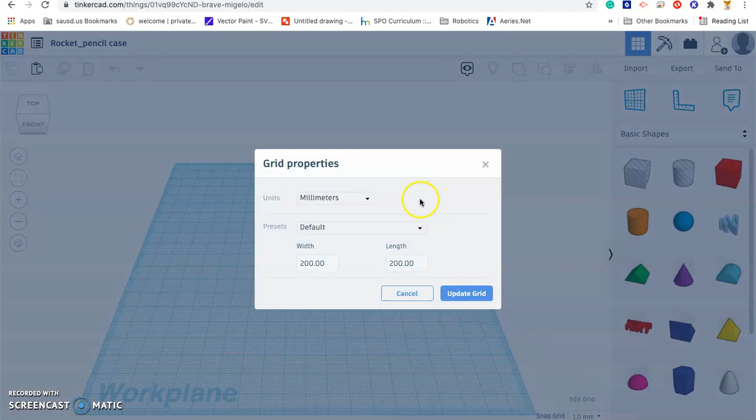Let's edit our grid. We're going to be working in inches, so we'll change from millimeters to inches and update our grid. As always, we want to drag the ruler tool to the lower left-hand corner of the work plane. Okay, so that puts us ready to start designing.

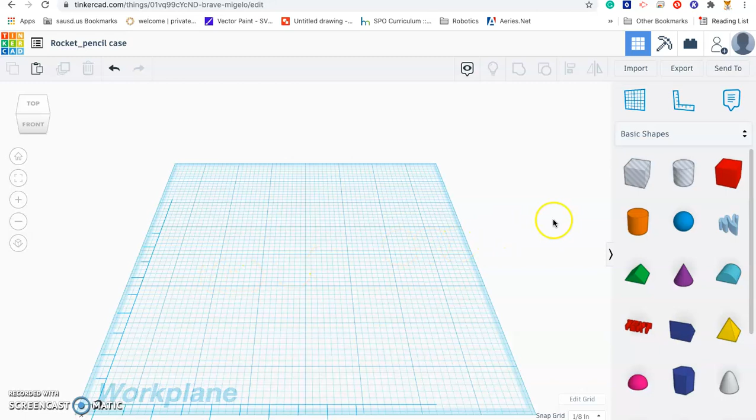We're going to start out with the cylinder shape. Drag it to your work plane. We're going to try making this one 1.5 inches in diameter. So 1.5 on the x-axis, 1.5 on the y-axis, front and left side.

Now, one thing I want to remember to do right away: remember that our cylinder is actually a multi-sided polygon. So this is a polygon with 20 sides around the circumference of what's beginning to look like a circle. The more sides we give it, the more it resembles a smooth circle. So we're going to drag it all the way over to 64.

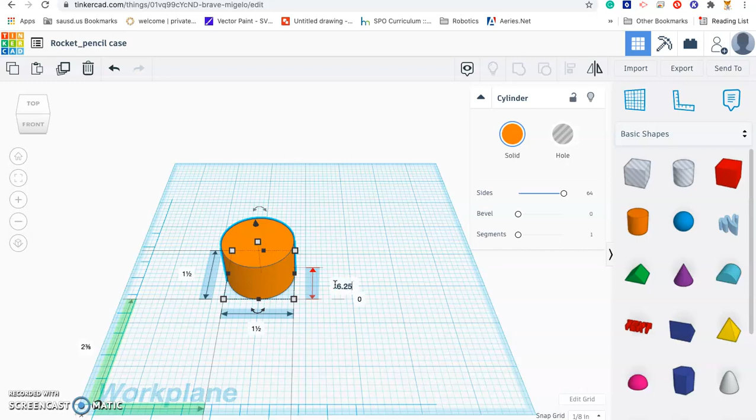Now we've changed our diameter to 1.5, 1.5. We're going to make this, let's go 6.25 tall. Okay, so 6.25. There we go.

That's our fuselage. Now, this is going to be the bottom half of our pencil case. So we need to create the fins, and we're going to use this shape called the roof. Drag it onto your work plane.

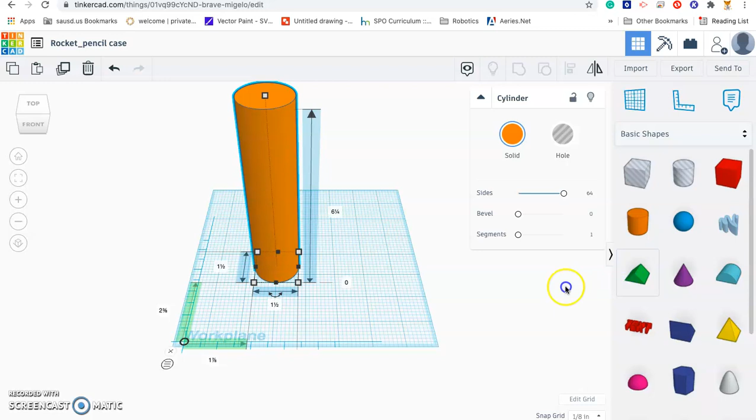Now we notice that it's 1 inch wide and only 1/2 inch tall. So this slope is basically moving in too fast—it's running faster than it's rising. So we need the opposite: we need it to rise faster than it runs. So I need this number here to be larger than this number here.

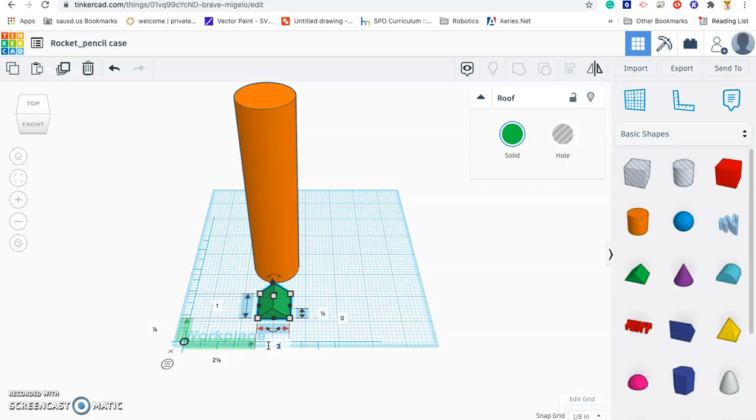Also, this needs to be wider than our fuselage. So let's make this, let's try 3. Enter. Okay, now let's go with 5. Enter. 5 inches tall. And then we want it to be skinny, a fin, so we're going to make it about 0.1. Let's try that.

Let's just kind of stick it in there and see what that's going to look like. I think those look pretty good. Okay, so now we've got 2 fins. We want to have 4 fins.

So we're going to duplicate this shape. Again, those measurements are 3 across the x-axis, the y-axis is 0.1, and the Z is 5. The height is 5.

Okay, so I'm going to click on this duplicate tool. It looks like 3 pieces of paper, and it doesn't look like anything happened. But in actuality, there's 2 here now sitting in the same spot. Do you see this curved arrow right in front? I'm going to click on that.

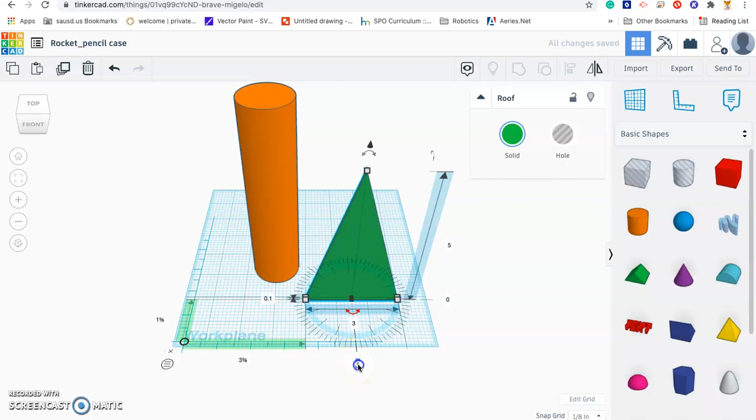And then I'm going to click on the 0 degrees and type in 90 and hit enter. And look what it did—it gave me another one at 90 degrees, perpendicular to the first 2.

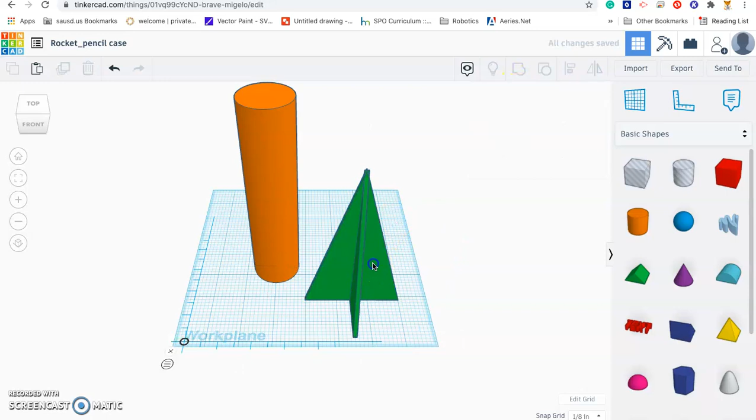Now notice I can't group it, because only this one is selected. So I need to click on my original fin, holding down Shift. Once I click on that, now it's giving me the option to group it. So I am going to group these 2 so that now it's one entity, one shape.

And I'm going to hold down Shift again, and I'm going to click on my cylinder.

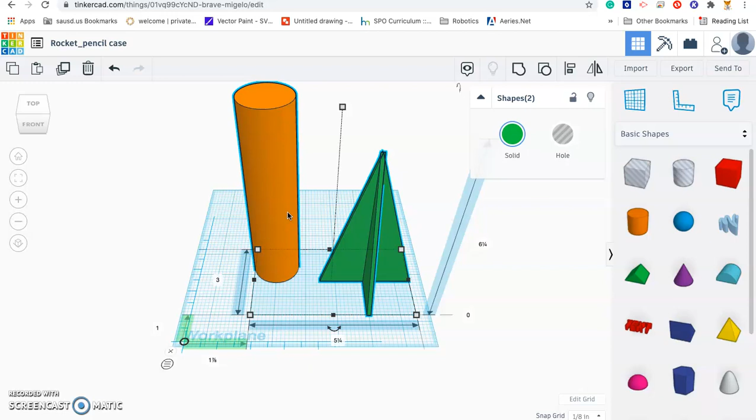And now I can use the alignment tool. I can either come up here to the icon, or I can just click the letter L on my keyboard. I'm going to center it on the x-axis, and center it on the y-axis. And now, if I like the look of that, I can group these two.

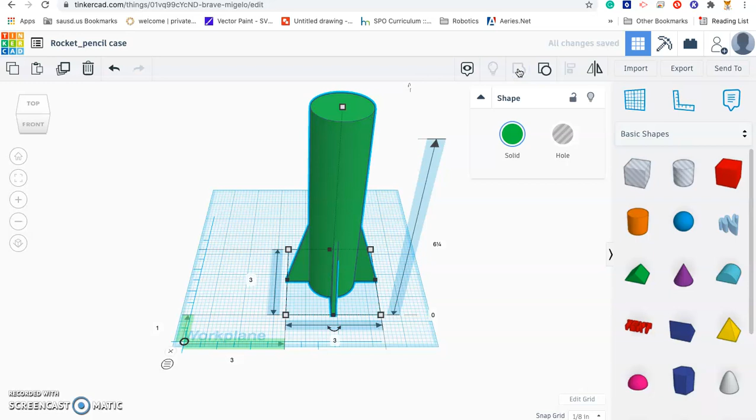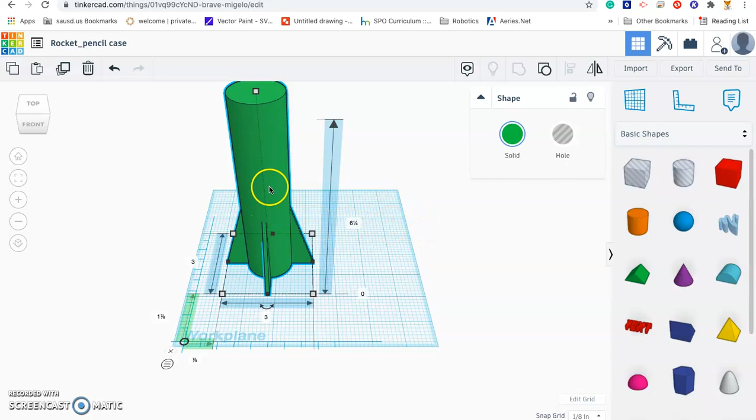And now, basically, I have one fuselage ready to go. The important thing to remember is that my diameter is 1.5.

Now we're going to make a nose cone that will slip over the top of this. So I'm going to drag another cylinder out. And I want the diameter to be a little bit more than the size of this because I want it to slip snugly over the top of my bottom piece. So I am going to make it...

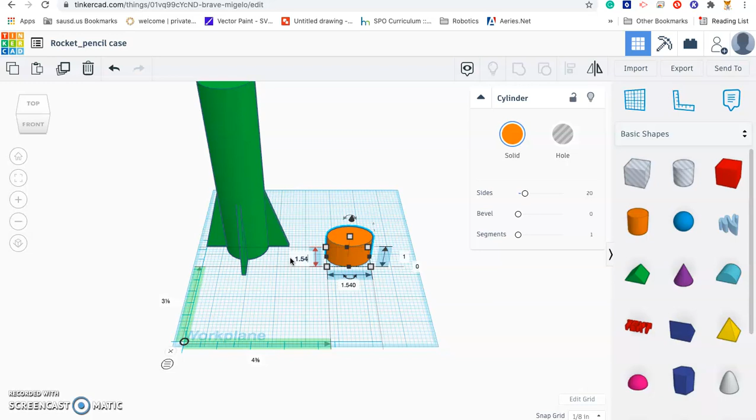And now, since we're working with the cylinder, I want to maximize my sides to 64 again. And we are going to leave this 1 inch deep.

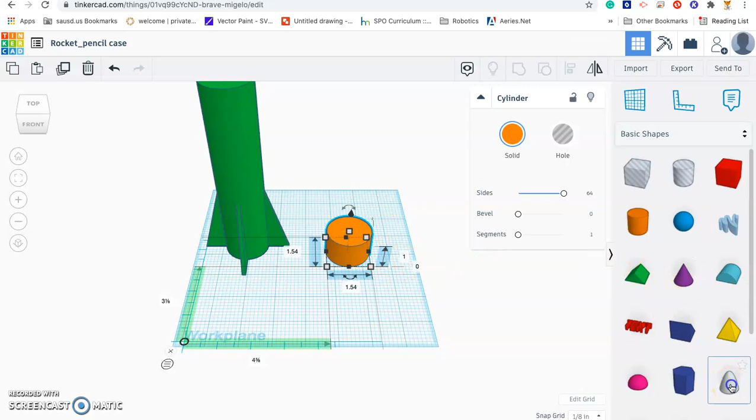Or tall. Now what I'm going to do is bring out this paraboloid, I believe it's called, and I'm going to give this the same base diameter. So, 1.54, 1.54.

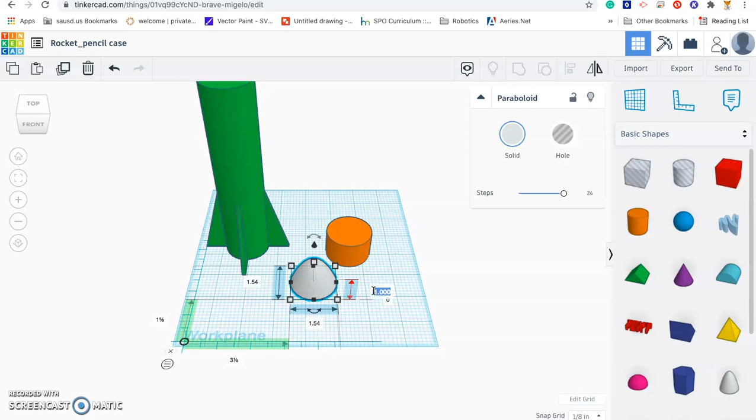And now I need to make this taller. For one thing, it's sloping too much. So let's go 2.5 and see how that looks. Yeah, I like the way that looks.

Now, I'm maximized on steps or sides, so that's as many as I can do, 24. I do have a workaround for this, but that's a little more advanced.

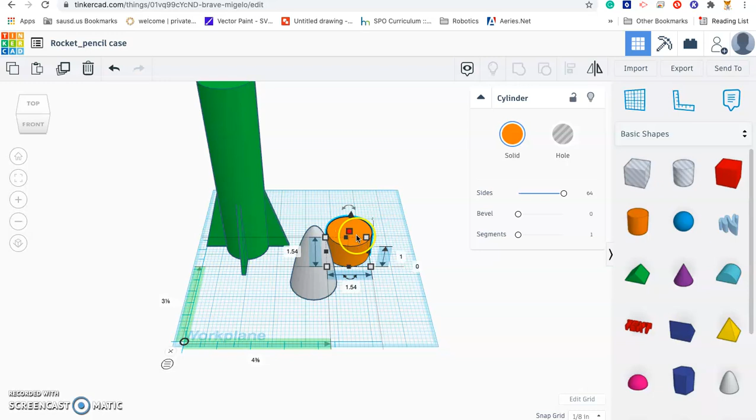So basically what we're going to do now is lift this nose cone up onto this cylinder. Remember that this was 1 inch tall, so I'm going to raise this 1 inch off of the work plane by typing on the 0 and changing it to 1.

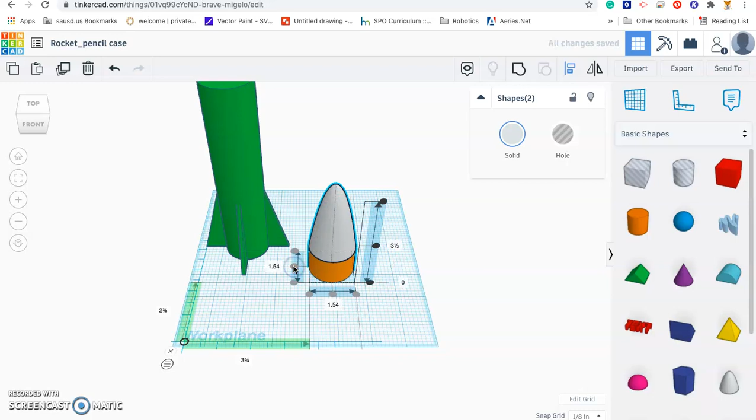Now let's hold down Shift and click on our cylinder so that they're both selected, and we'll hit the L on our keyboard to get the alignment tool, and I'll center it on the x-axis and center it on the y-axis, and I will group these two pieces.

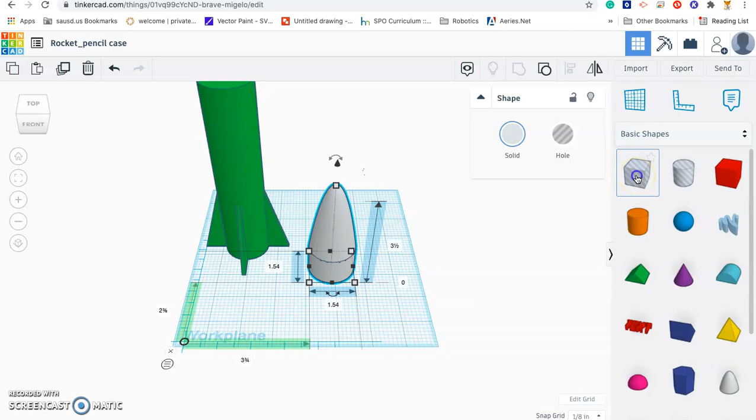And now what we're going to do, notice this is 3.5 inches tall. I need to cut a little flat bit off of the top of this because I'm going to be printing it upside down. So I'm going to bring this out and raise it up to, let's go 3.25. Enter. So I replaced the 0 with 3.25.

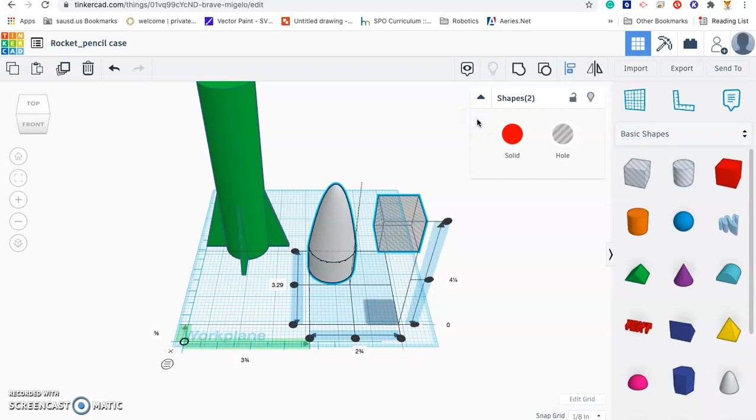Now I'm going to hold down Shift and click on my nose cone. Click on the L. Align them, center them on the x-axis, center them on the y-axis, and group them. And now I've got a flat bit there.

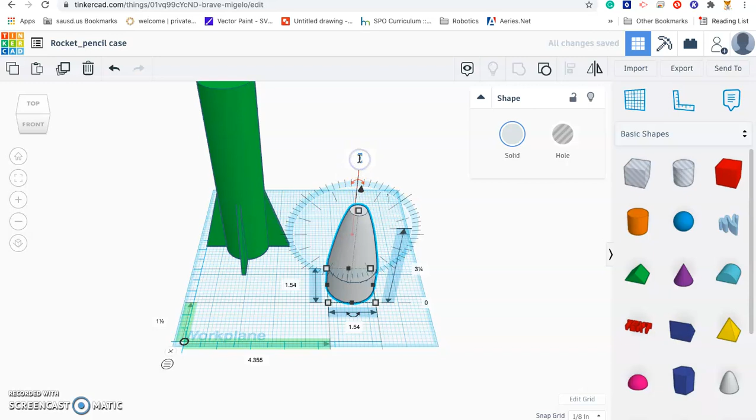Okay, so I'm going to click on this curved arrow, and I'm going to spin it 180 degrees. So now it is sitting on the nose cone.

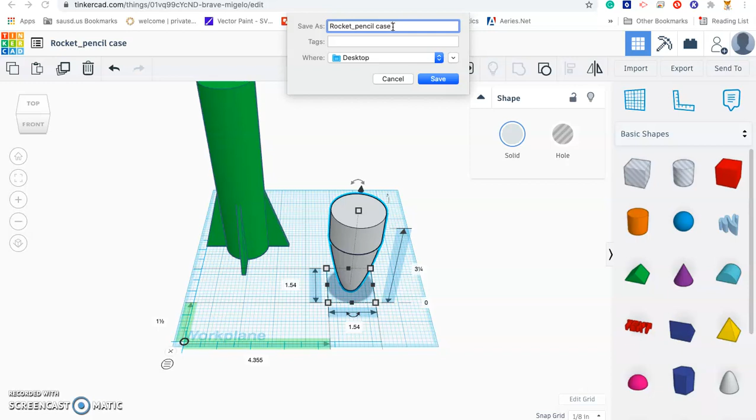Okay, so from here, what we would do is click on one object, click on the export button, export it as an STL, and now I want to change my name slightly to, I'll just put NC, NC for nose cone, okay, and save.

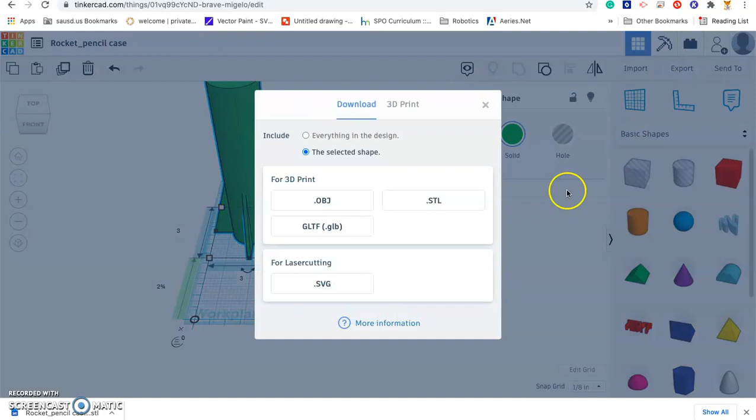Okay, so now I deselect my nose cone and I select the base of my rocket, and I do basically the same thing. Export, STL. This time I will add the word base. Okay, and now I've got my two files saved that I can import into my slicer to print these using vase mode. Okay, that's it for this lesson.